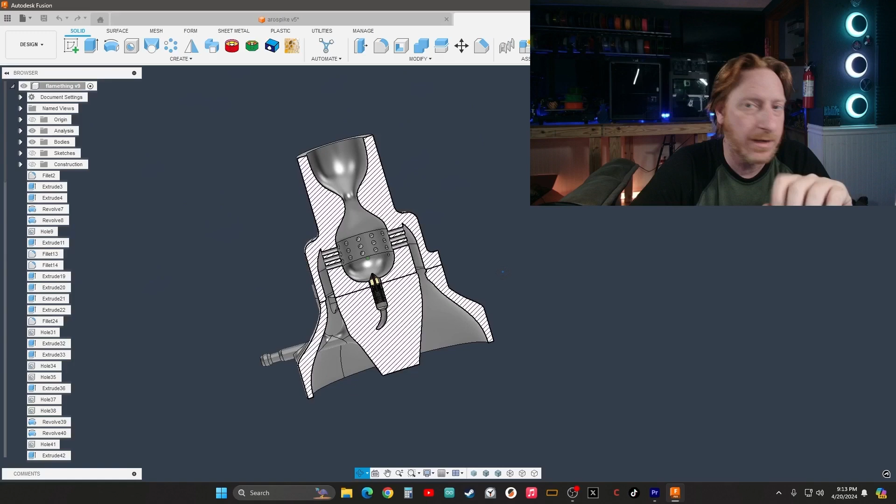Nozzle heats up and the plastic it flows. A creation takes form as the live stream goes. Heart of a maker with a tech-savvy show. Designs in the making, see the hotbed aglow. It's shenanigans 3D on the digital stage. With each layer printed, he's the maker.

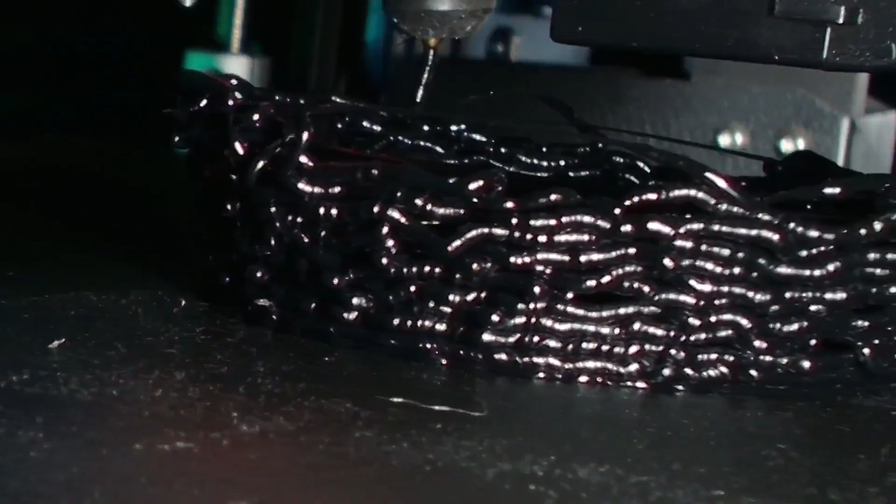Let's start the show. Layer by layer, we watch it grow. A twitch in time with shenanigans flow. Chaos reigns with a fiery glow. We're live. We crash.

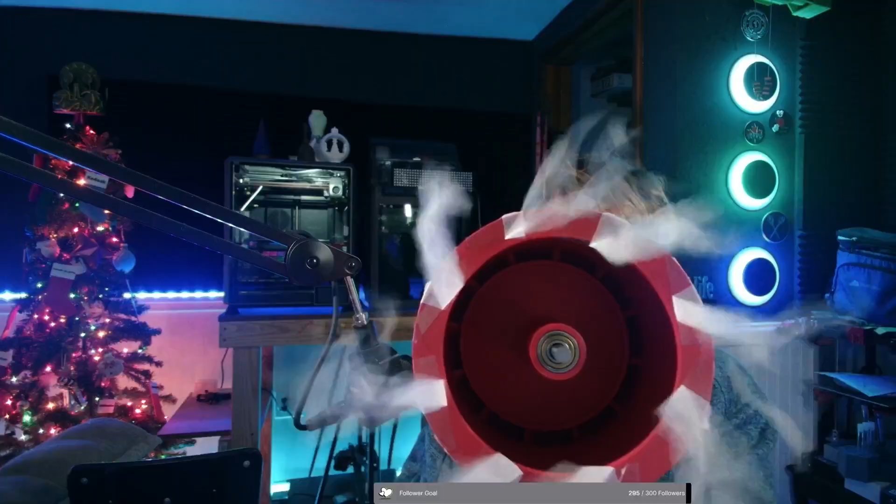Now watch closely as the filament spins. A wild ride where the line between fails and wins. Accidental art when the plastic rebels. Shenanigans 3D, he's breaking all the levels on the edge of tech.

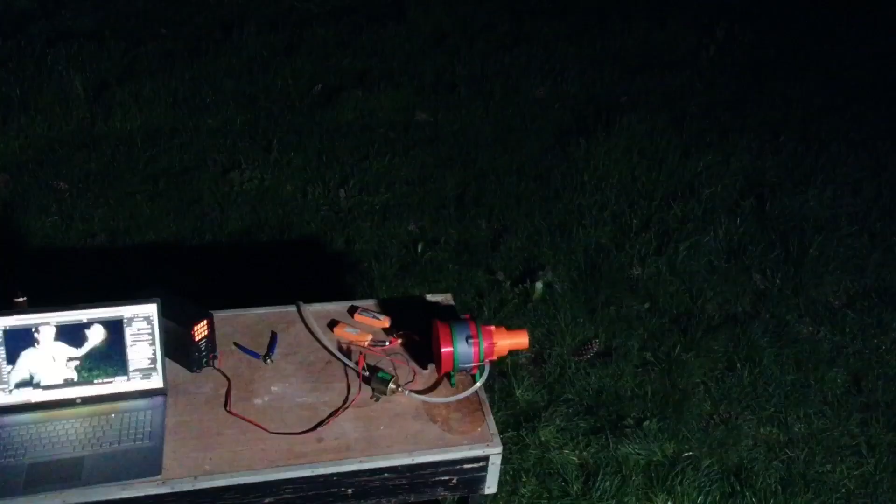Every stream's a gamble, roll the fiery dice. Pushing limits, bending rules, not one to think twice. Heartbeat pulses with each print he creates. While the chat's wild wonder in suspense they wait. Rising with the flames in the shenanigans game. Printing out the future, no two prints the same.

What is going on, everybody? Yes, this is a surprise pop-up stream for a Monday. I'm sitting here going over some things, and I was like, you know what, I'm just gonna stream it. I'm just gonna stream my day. How's everybody doing? I hope everybody is well. I just did my shout outs, and I'm checking on something. I did something. Yeah, I did something.

I did something that's... oh, the wrong button. I did something that involves this. So something's coming, and I'm checking it right now, and it has been shipped. Something's on its way. It is coming from KB3D.

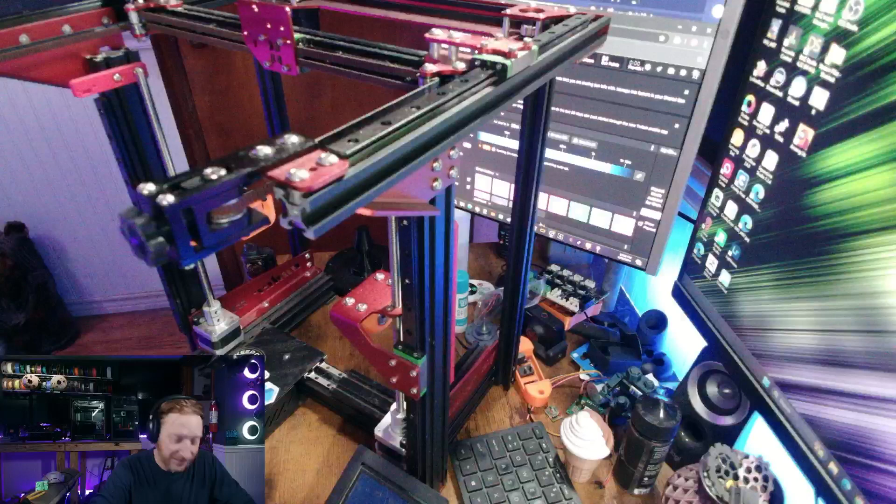Gonna work on this today a little bit more. Yeah, they are very quick at shipping.

They sent me a care package 9 or 10 months ago when I started streaming. Chris sent me a package, and he asked me for my address, and I gave it to him, and like a day or two later, I come home and there's a package on my porch. I'm like, what the heck is this? And I open it up, and it's a whole box of resins. So he surprised me with that, and we've used them here on the stream. In fact, I got more resins in my cart. Well, I took them out of my cart because I bought something last night, and I didn't want to add that to the order quite yet.

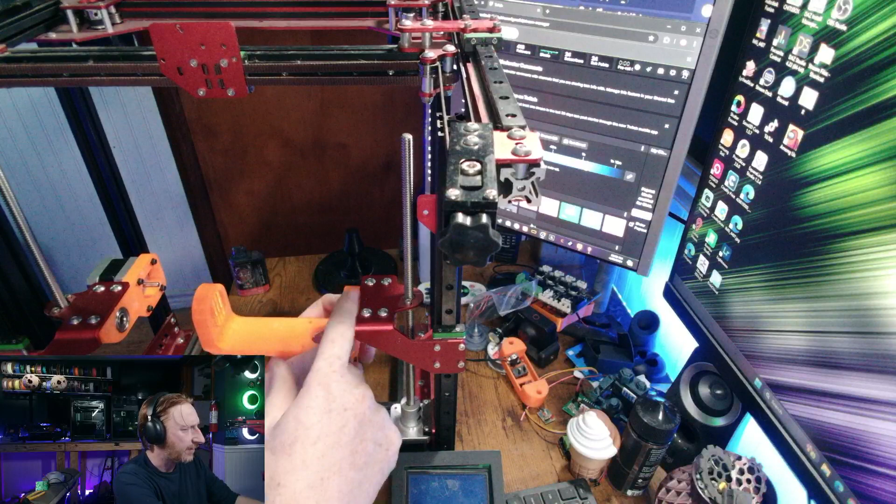We have plenty of room. We got the pulley that's going to go here. And this will be up against this, okay? So we'll have the flange coupler right here, and that will be up against these bearings. We have this much room, but we have the pulley that's going to go here, right? So we got a bunch of room there. So we can move this stepper out to clear the screw heads, and that's where we're gonna go for there.

But I tell you what, noticing this right now, look how flexible that is. That is very flexible. So we will have to beef this up a little bit, and we got to make sure that we're really solid with the build plate. When the build plate's up here, we got to make sure that it's not wobbling on us.

And if I run a thrust bearing down here, I'm gonna want to do another one up here as well, right? So we're gonna have to have two of them up here to keep it from wobbling around, which is fine, because if we brace this across here, then we can add our other bearing up here without having to put some kind of column up there. So yeah, that's what we'll do.

So, one thing I need to do is, this is the idea I have for this. Let me get my face off cam so we can get full screen here. So I actually want to make this pretty nice, so we can make sure I'm not hitting my monitor over there, which I was.

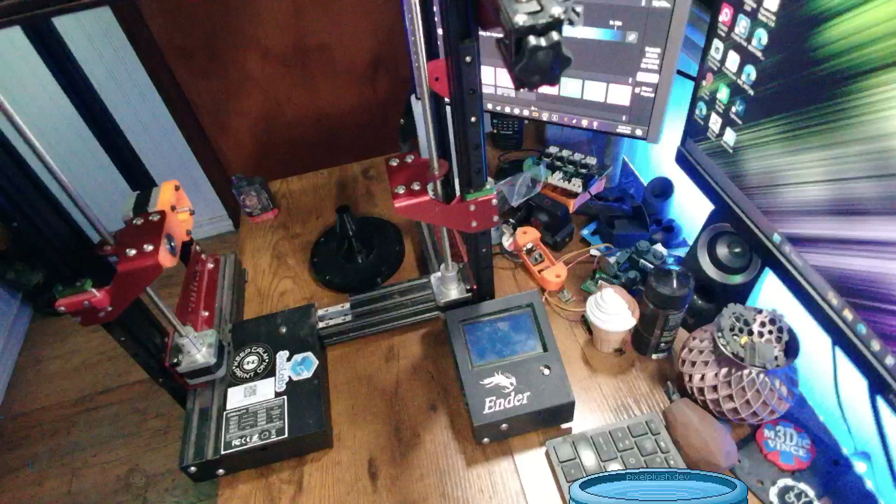Okay, so this is getting removed. Let's bring this down here for you. All right, so this is getting removed. We'll remove this today, this is getting removed. This is getting water cooled, I want to water cool this. There's really no point to it, but I want to water cool it. I kind of want to make this like a flashy kind of thing, right?

There's going to be a control board right here. I need to make a mounting system for it. It's going to be enclosed, we're going to 3D print an enclosure for it for the control board, and I want to have it lit up inside, probably red. So there's going to be red LED strip inside. But I got to reach out to KB3D and have him see if he can cut me out a piece of acrylic.

White acrylic, and then laser etch shenanigans across it, either shenanigans or my logo. And then I want to take white LEDs, real little teeny tiny ones, along the side just to light up the etching. I think that would be pretty sick.

The power supply, okay. So I'm going to be running two power supplies. I know, you're probably wondering why. So I'm not going to go too far into the reason why I'm running two power supplies. I probably actually don't, no, you know, I should probably only run one, because if I'm thinking about changing that out, yeah. Anyway, power supplies will be here.

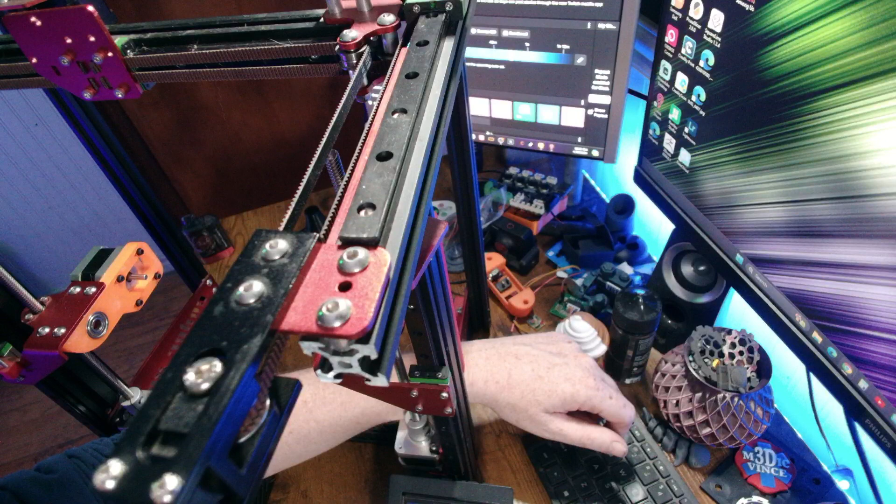There, Maker Deck, they shout. I want to make sure they did a notification for me. I want to make sure I get that back there.

Yeah, I can't get this. I cannot get this screw out for some reason.

Oh, my ear's itchy. What's up, Phantom? How are you doing today? Let me go get a tool real quick, now I should get this out of here.

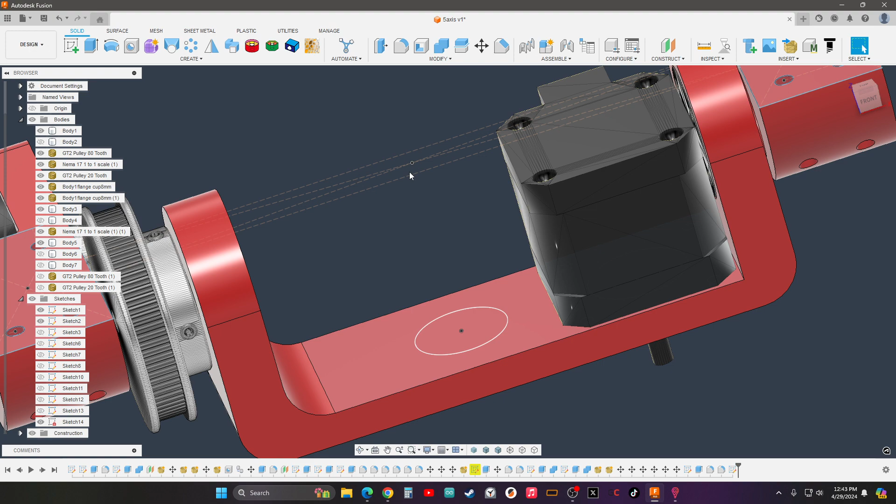See, what's interesting though is these lines right here, that's my center point. That's my center point of the machine. I measured that out. Let's see what, from this point to this point, what is that? 158. That's not right. This must have moved on me. That's not right because I know it's not 158.

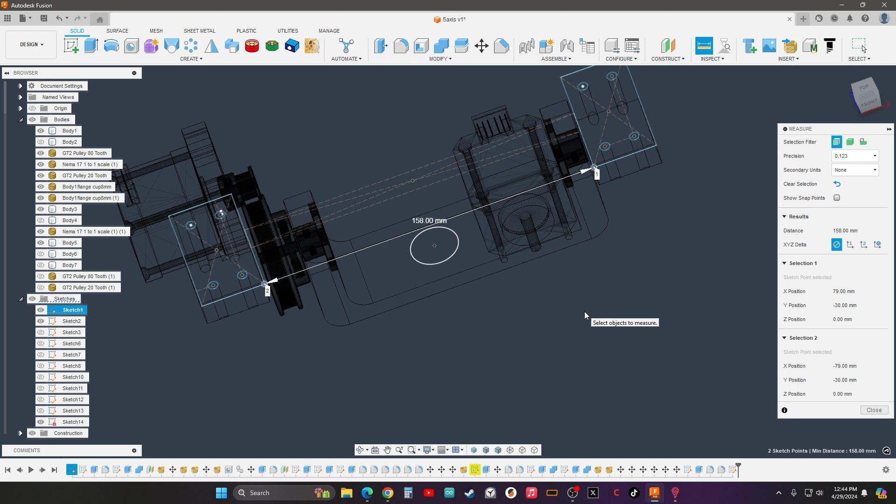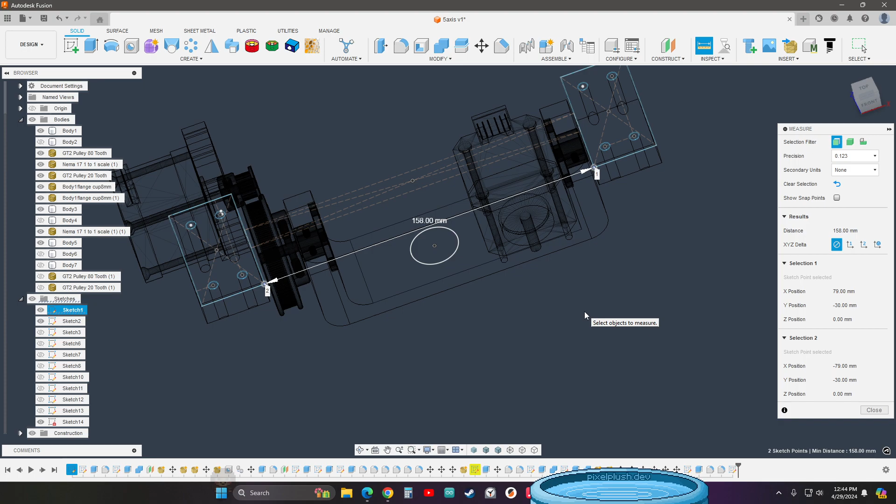I can actually measure it right here on this. So I can bring back my overhead here. Well, that's gonna be crooked. You guys got to deal with it. Well, it's not even working now. There we go.

So that's 158. And this, if we go to 150, I know it's longer than 158. I know that. So we go to 150, and we measure from here. Actually, let's measure this. That's 149, and we go from here to here.

Let's say that's 49. My math is not working today. Yeah, 198 is what I have. 150, so that's 40 millimeters. That's 40 millimeters that we have to play with. And then what is the thickness of these? What's the thickness of these?

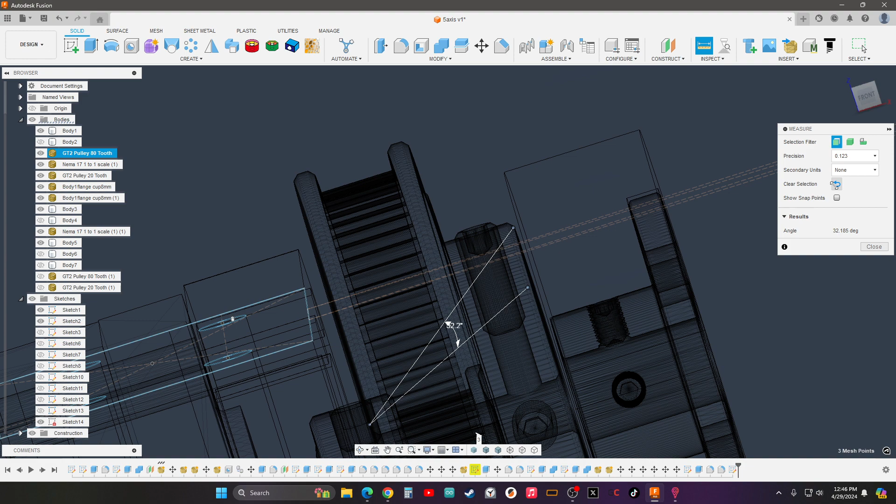So we got like 20 millimeters to play with. That's not accurate at all. This is not accurate, but it'll give me, dang it. It'll give me an idea. 24, well, it's still not accurate. Why is that going? Why is it doing that? Anyway. We have probably about 20 millimeters to play with to move this. We can move this over.

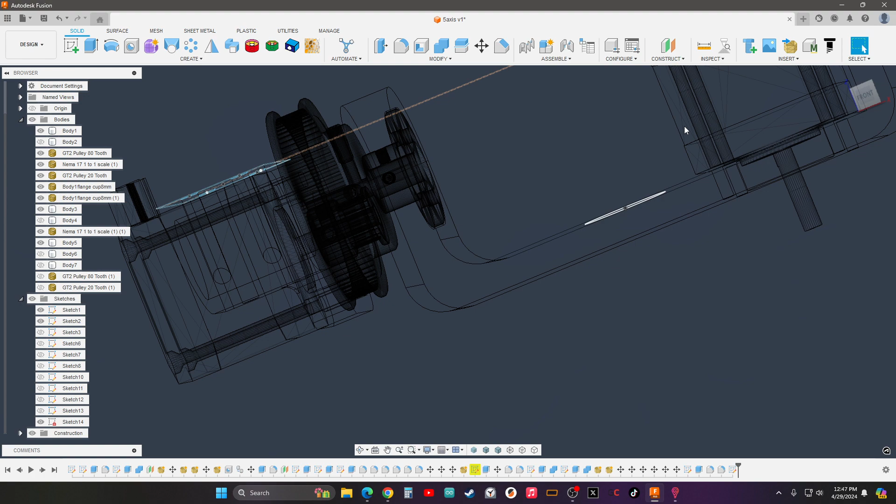3D Print World, welcome in, my friend. Hey, what HT were you looking at? Were you thinking about getting? How are you doing today? I need my coffee. Coffee's always good. Oh yeah, coffee.

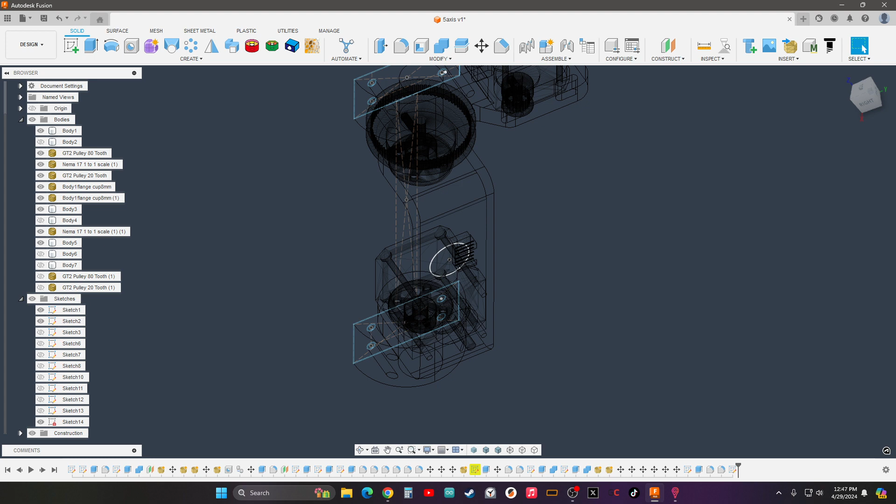Okay, so let's save this. I'll move that over later. We'll save this, and we'll go into the design, at least somewhat give an idea of what size box I need to make this.

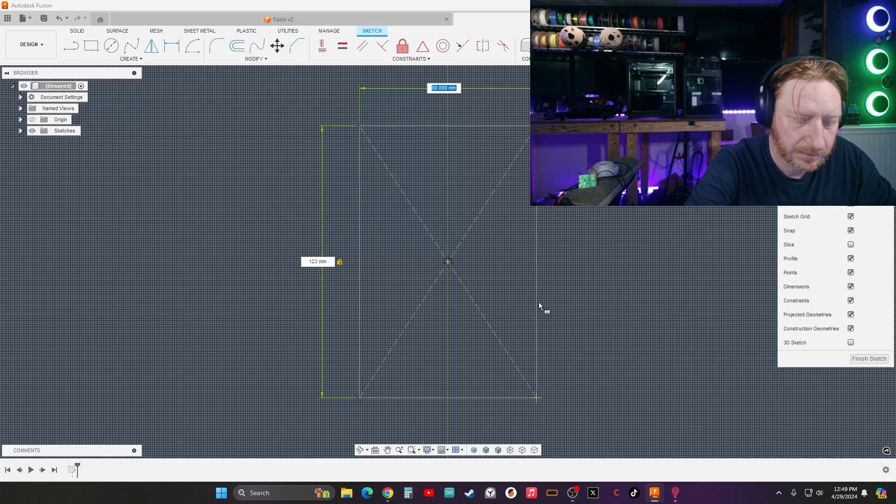Okay, so what were the measurements again? Measurements were 123 by 247. That's not right. Forgot to hit my tab. 247. That's a big box. That's gonna be a big box.

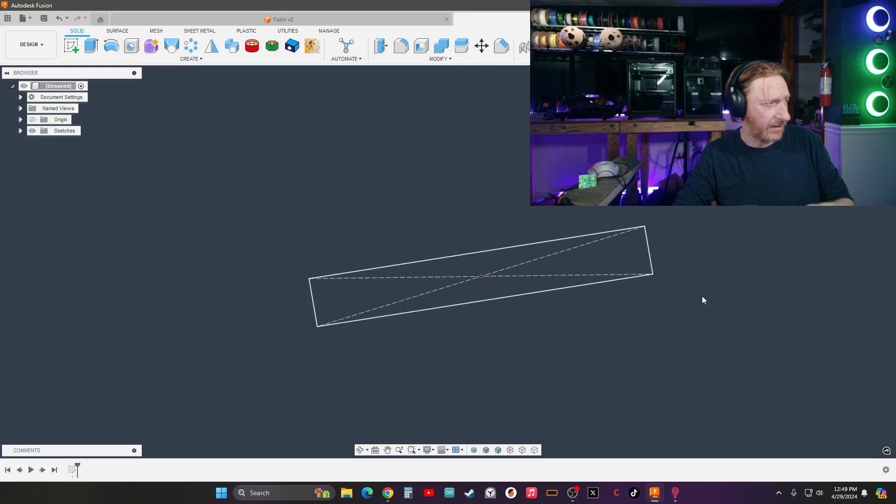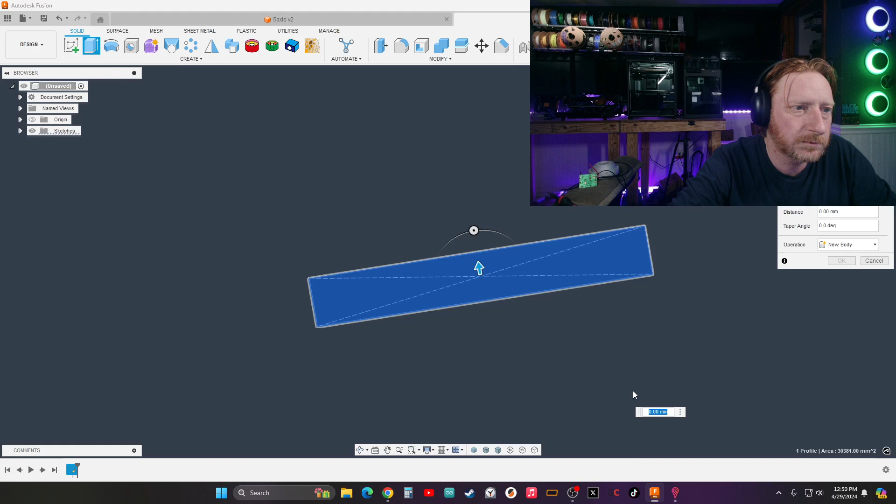The height of this. I'm not sure how high this thing is though. 40 millimeters. Okay, so there's our box. And let's do a shell. Let's take the shell. We probably should take the shell. Two millimeters. We'll take the shell 2 millimeters because we got to worry about ports as well. So we'll do 2 millimeters. This will probably going to change.

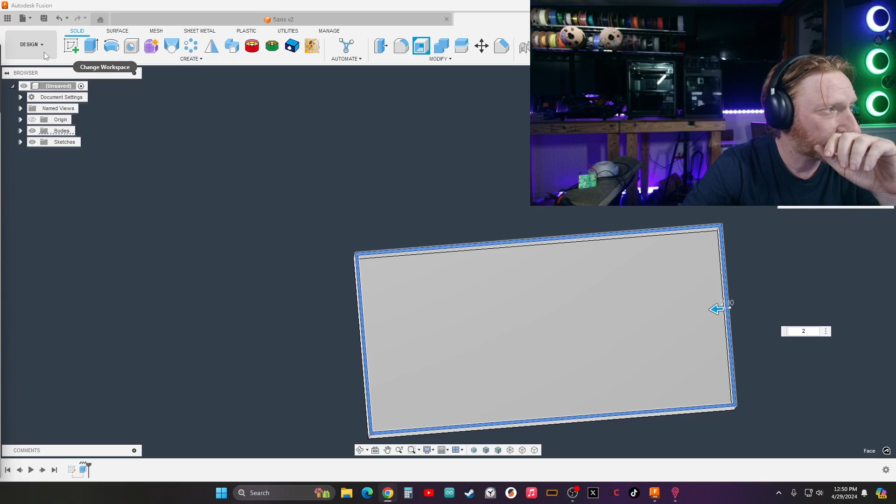So now I need to bring up. Make sure you don't see this. I need to bring up the dimensions of this product, of this thing. So this thing, let's do an offset on our, bring an offset up to about 10 millimeters. That should be good.

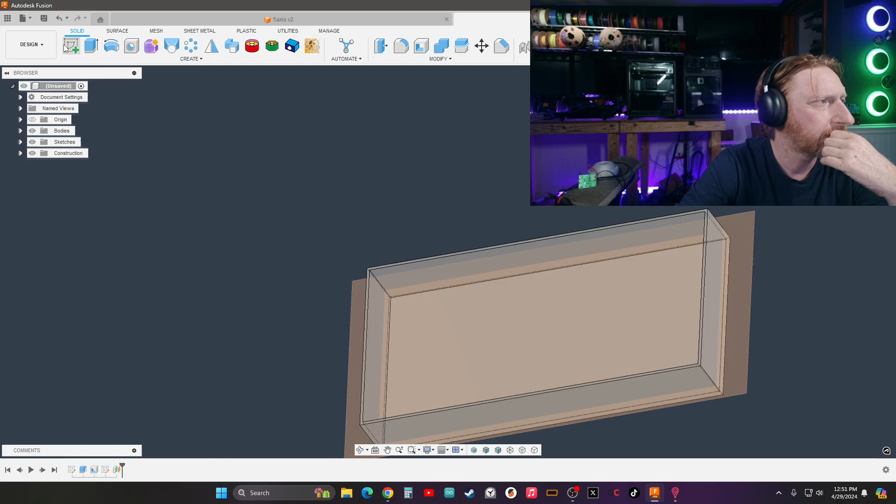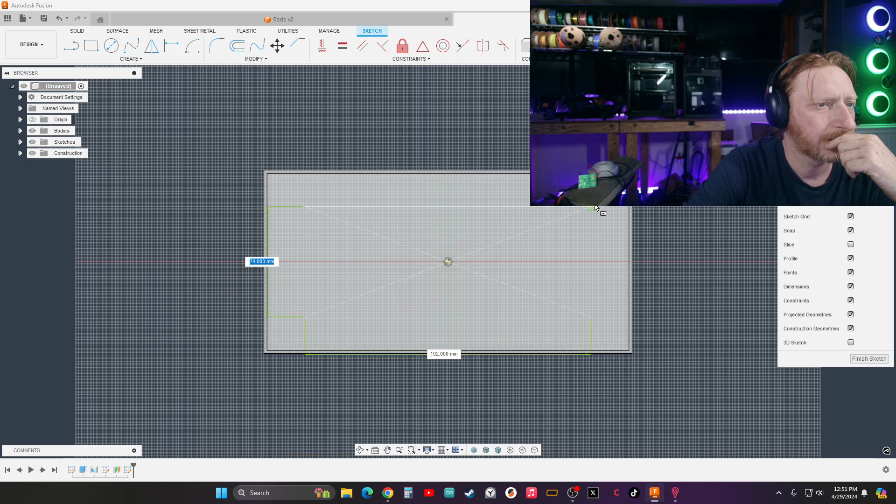Did you see what Two Trees just released? They released a printer where the bed moves around like this. The bed moves up and down, like twists. It pivots. But that's only for leveling the bed. I don't think it's for printing that way.

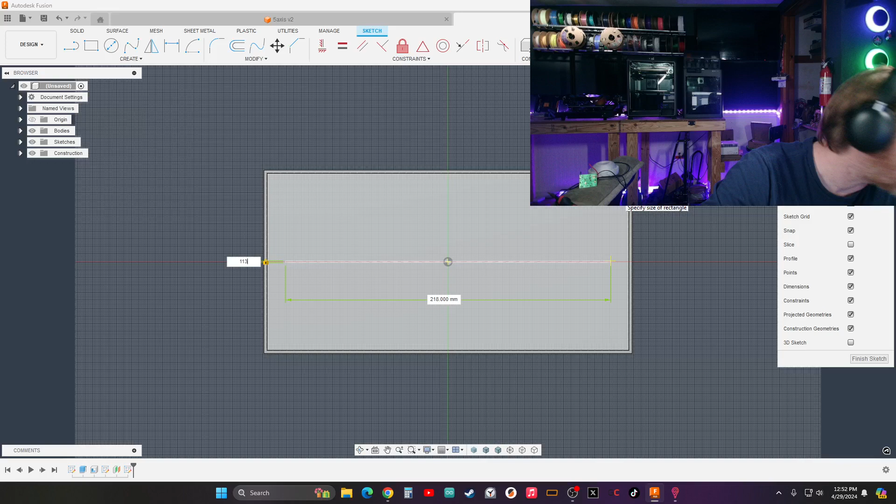Okay, so these specs are 200.03. Nope, that's not the right one. They're 113.03. And hit the tab. 200.03. Ooh, that's pretty big. Wow.

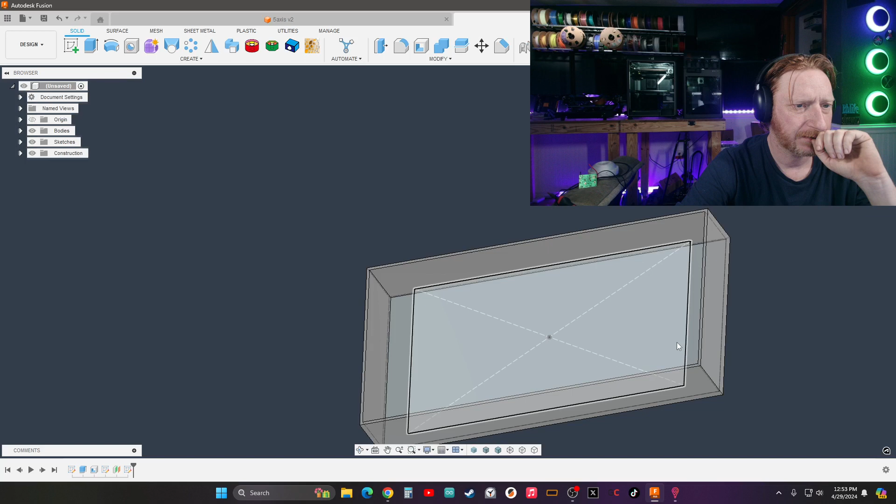So I have power on this side, and I have ports on this side. That would probably work. So that's 200. What did I say this box was? 247. So that gives me, that's giving us 20 millimeters on each side. So you might have to shift it over, because those are probably going to be some pretty thick. I think we can squeeze that in there actually.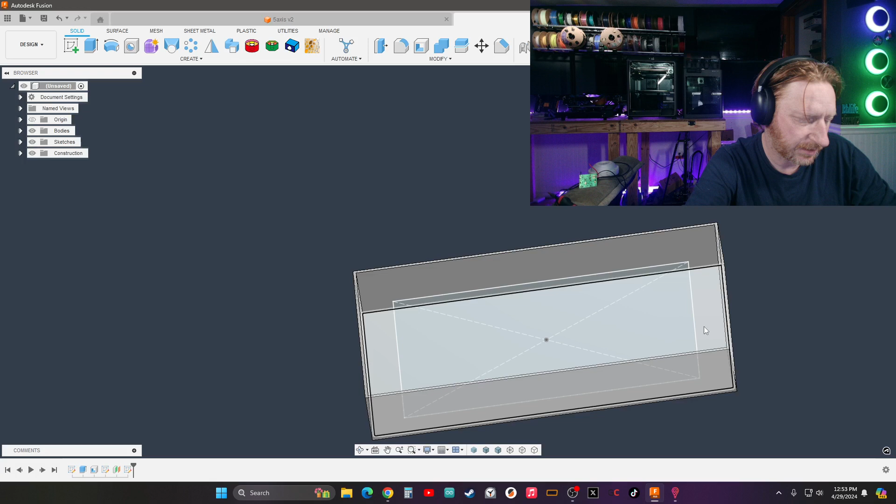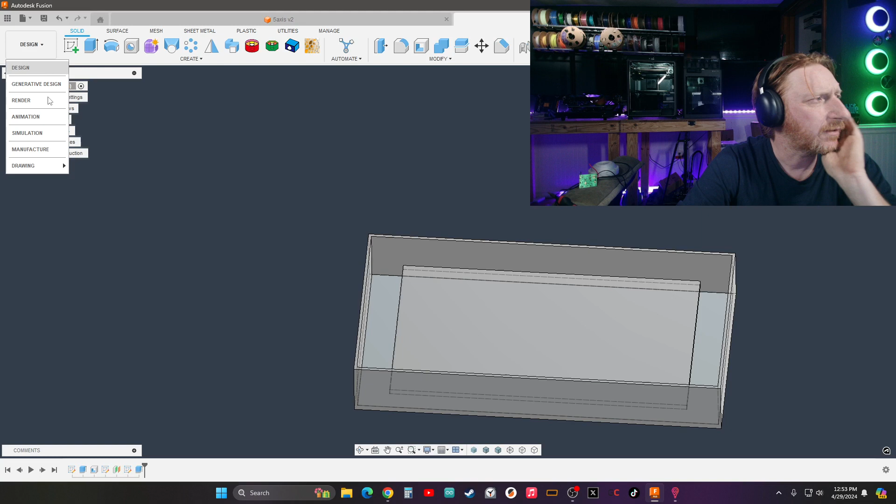Let's do this at 4 millimeters just to get an idea. Let's go into the design and let's render this. And we're not going to fully render it. We're just going to...

I don't know what printer fits it. I think it's more for custom. It's more for custom printing. Custom printers, like Vorons and stuff like that.

So let's color this so we can see what's going on. We'll do, I don't want, gotta download some things.

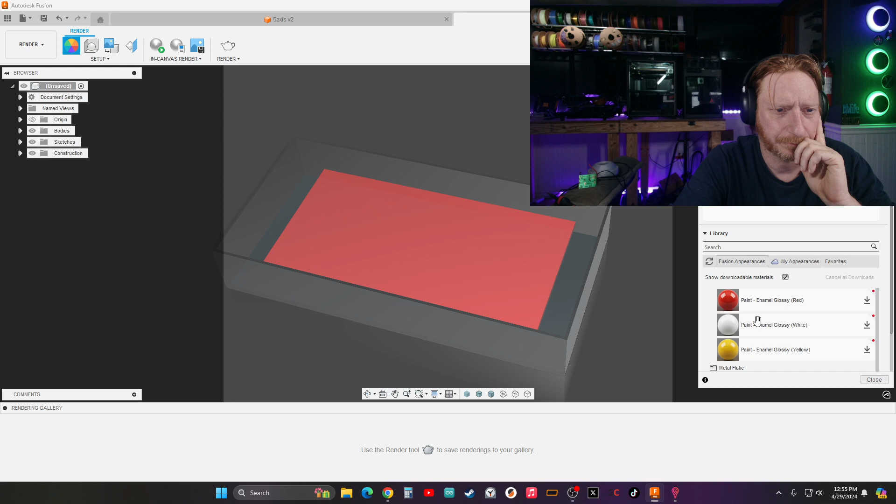I wish they didn't have glossy paint in here. Well, we should probably actually do this in gray for now so I can see what the heck I'm doing.

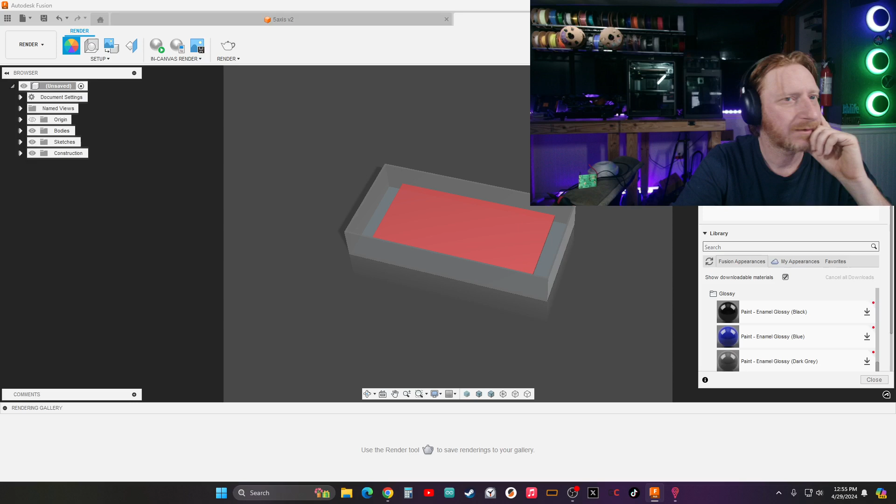God, I love meetings. Okay, so let's get back into here. So there we go.

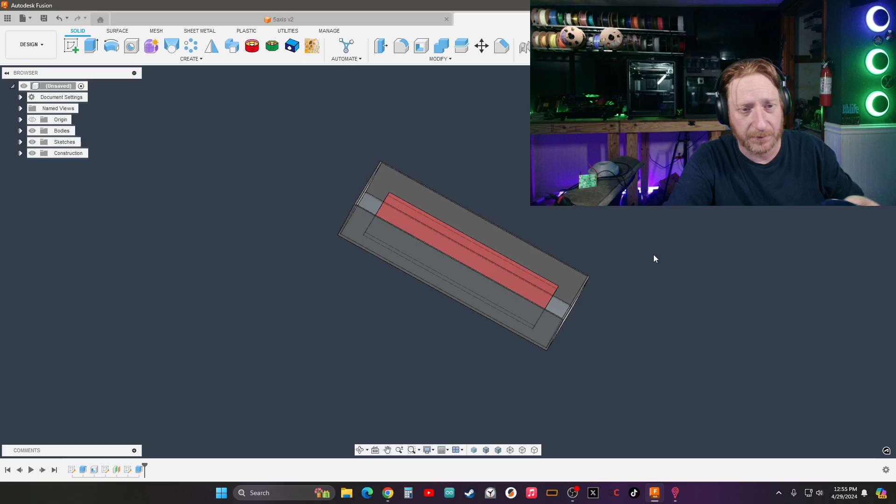This is going into the core, into the 5-axis, the one that we worked on yesterday. This is going to be for the control panel. This is the control board. It is going right in front of the printer.

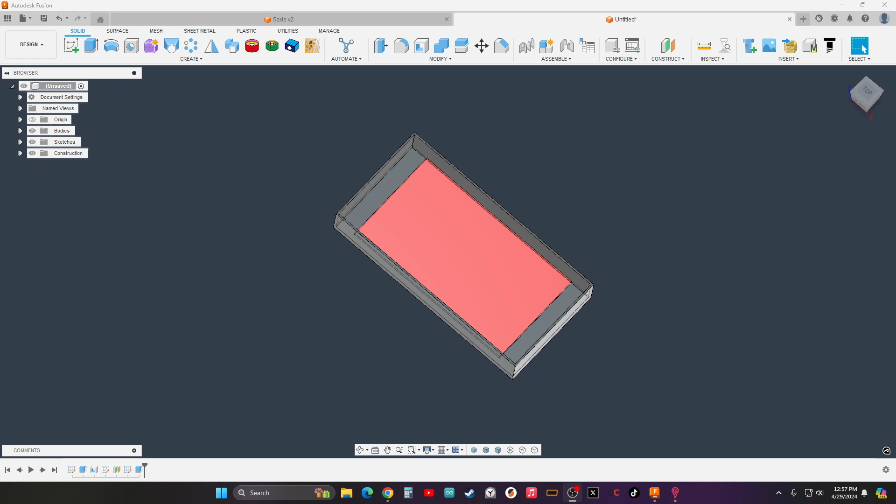Sorry, I walked out of the room to find my dogs ripped my bed sheets off my bed and they're laying out in the living room. Anybody want some dogs? They're real nice. They're not friendly.

Anyway, okay, so let's get back to the screen here. Oh yeah, no, I was gonna show you. Yeah, so the control board's gonna go right here. We're gonna make it all nice and pretty.

Yeah, there's gonna be a water cooler here. The radiator is gonna go here. I'm putting a water cooler on. Why am I doing that? I don't know. Power supply will probably be here, or maybe here. Maybe put power supply here. Actually, I don't know, we'll figure that out. We'll see how many power supplies, if I'm running dual power supplies or not.

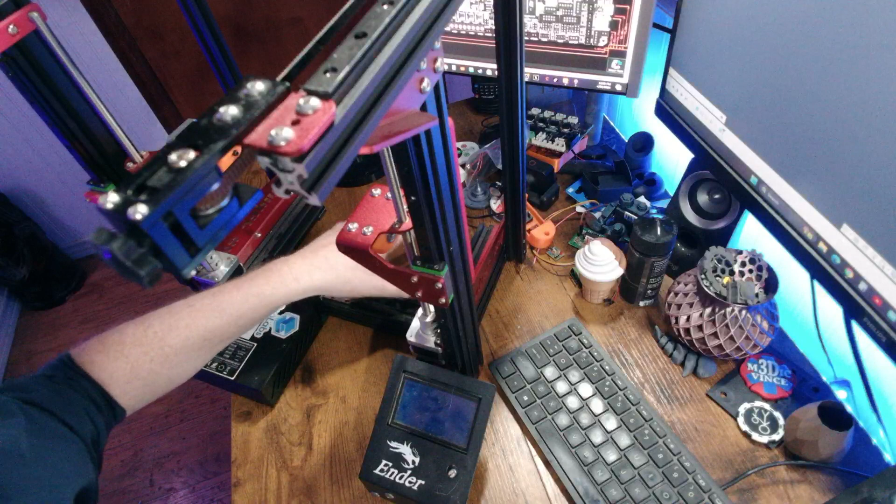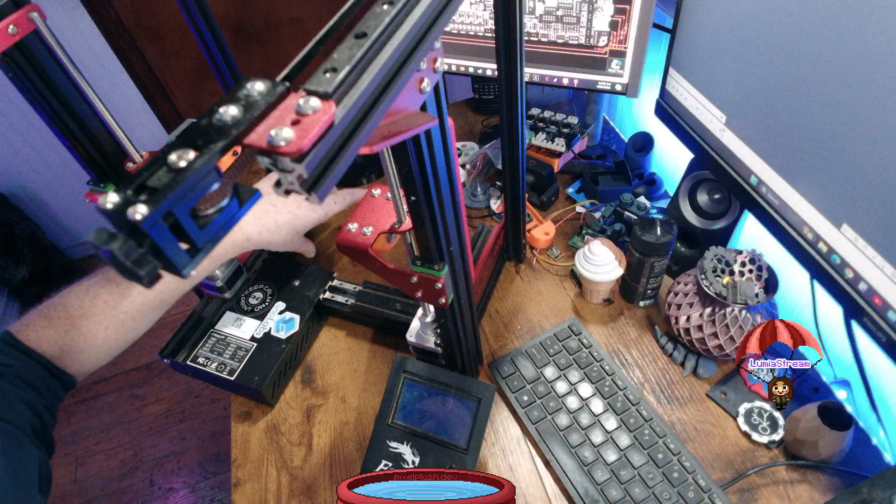Yeah, we'll see what happens. I might run a single power supply. Actually, let's see how much. Yeah, I might run a single power supply and then have a converter, a 10 amp converter. I do have a 10 amp converter, a step down buck converter that will drop it down from 48 to 12. So maybe I'll just do that.

So this, I do have a rendering program that I can put models into and render them in high def, so we can do lighting and stuff inside here, but I don't think my stream would survive that. Doing some of that rendering is some pretty serious stuff.

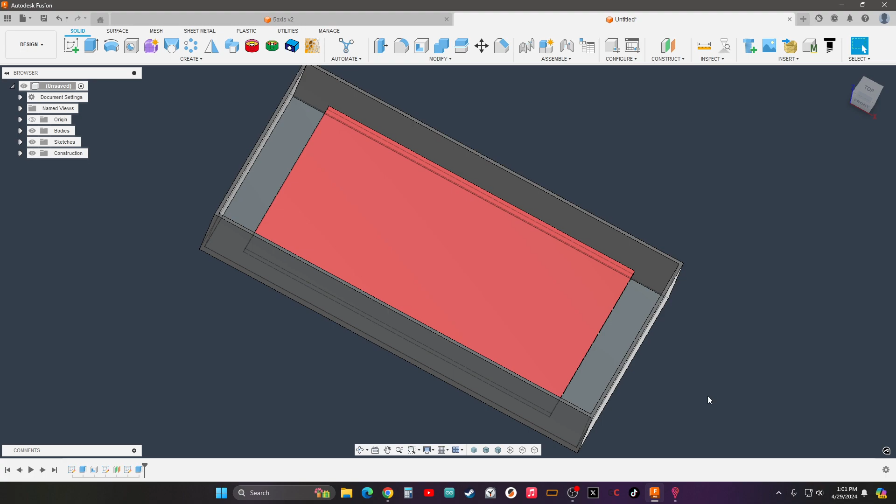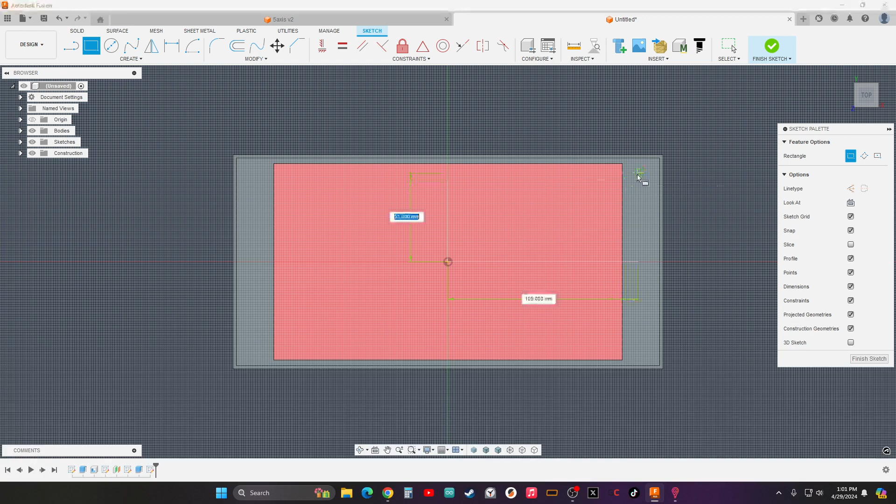So we have that, and then we'll have this. It'll probably just be somewhat like that, that way my wires will be hidden here. I don't like the edge of the board. You'll be able to see a little bit of the edge of the board, but the main part of the board will be visible, the logo will be visible, that will all be visible.

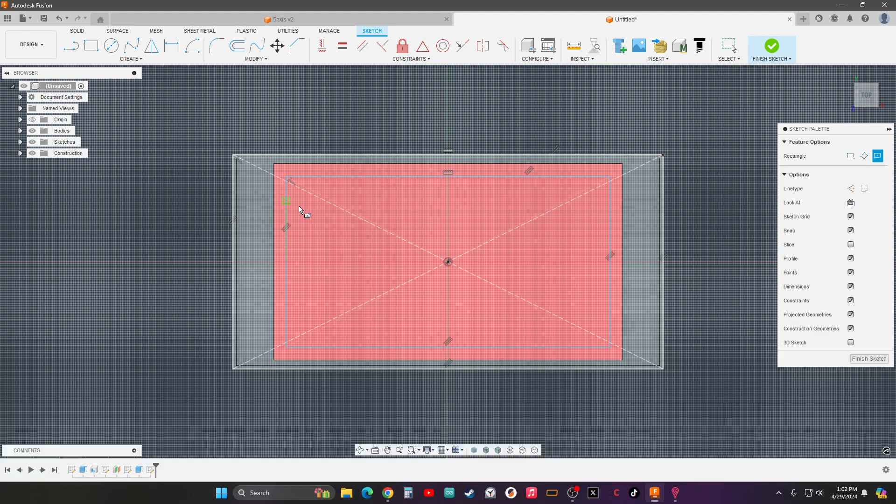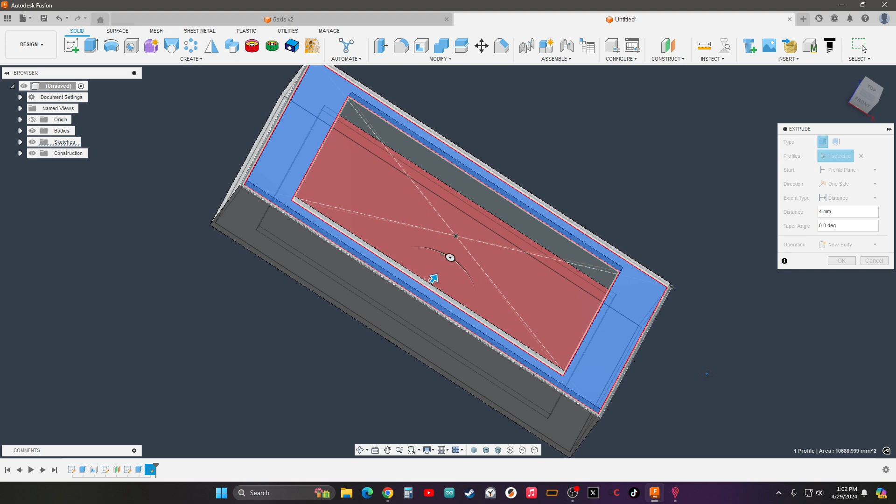We'll finish this sketch, and then we will extrude this up about 4 millimeters. We'll actually add some — no, let's take this to 6. Let's take this to 6.

Oh yeah, definitely, I do most of my rendering and stuff on my other PC. I can do small stuff on this one, small renders.

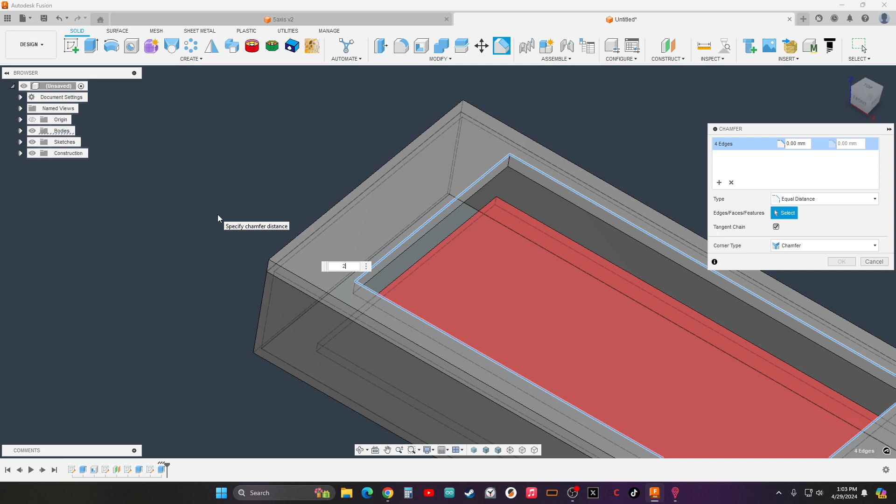Okay, we're gonna make this a new body. I do want to bevel this though, probably chamfer it maybe. So we brought it up 4, we can probably go 2. Now let's see what it looks like if we go 3. We can do the same with this outside. Yeah, let's do 3 on this one as well.

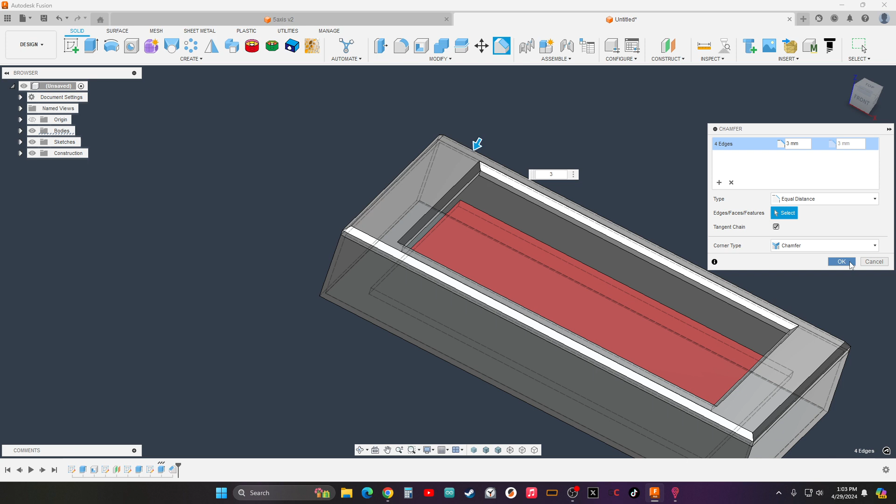Let's go into the rendering of this, and we'll change that color to the color we were using, which is, we're going to go to black.

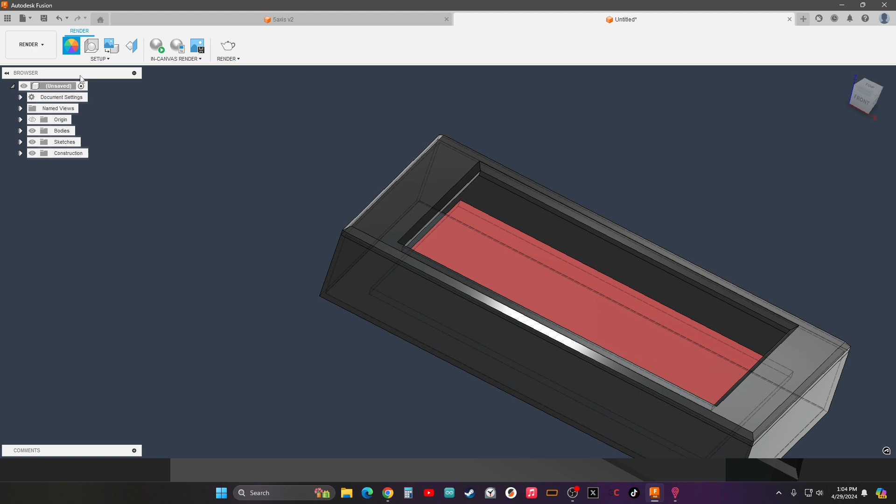We are working on a 5-axis 3D printer. I'm using an existing printer, actually an Ender 3 that has a Core XY kit. And now we're designing the 5-axis — we designed the 5-axis mechanism yesterday, we need to go back and fix it. Right now we're designing a display for the control panel for the main controller.

I think I'm happy with the way that is. Let's actually get the...

Username shortcut is broken. What do you mean the username shortcut is broken?

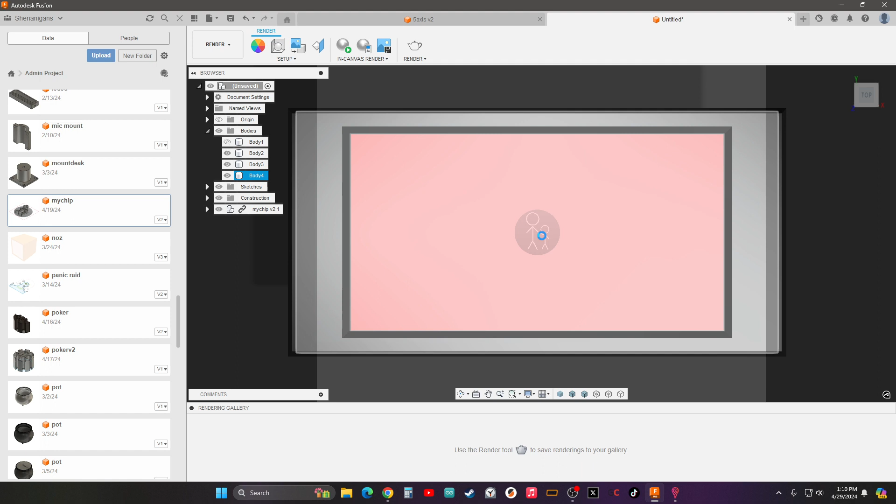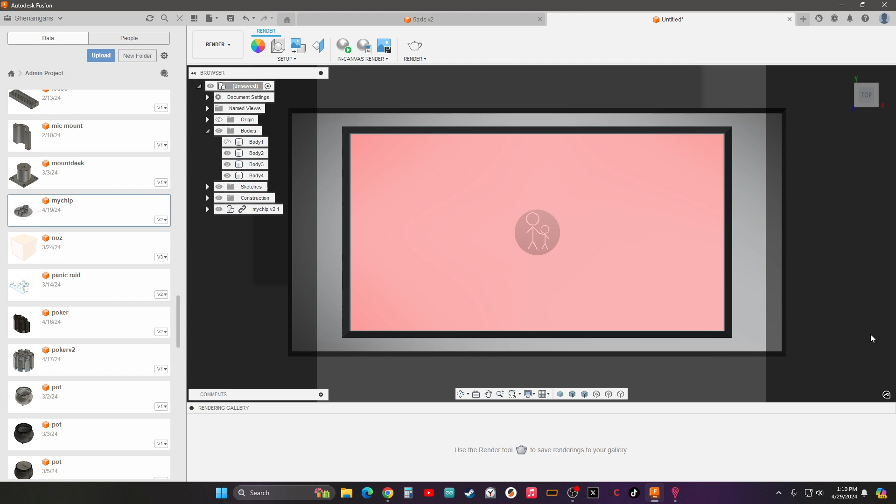I have a 4 terabyte storage. I have 6 terabytes total on this PC, something like that. So yeah, I have an internal hard drive that's 4 terabytes, that's just strictly for storage. And then I have a 2 terabyte that's for the PC itself, for all my stuff. I think, maybe it's 1 terabyte.

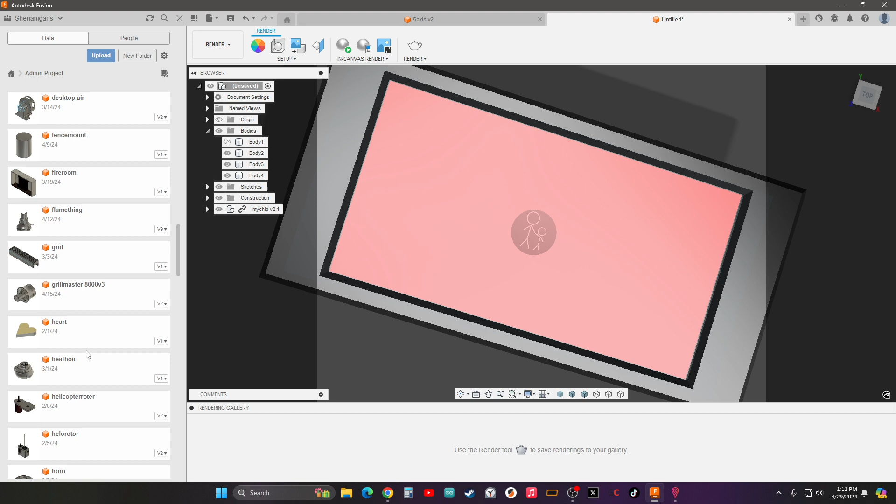And I have a RAID system for my house, so anything here I don't want on my PC, I'll just send it off to my RAID. This is all just stuff I work on throughout the week, just a bunch of ideas. All this stuff here is just all ideas. Well, there's my little desktop air raid siren, and then a couple of rocket motors and just a couple of things. I need to go through here and clear it out.

Okay, so where is this? What's all in here? The body. How can I access this? Oh, I have these all down components now, don't I? Yeah, I do.

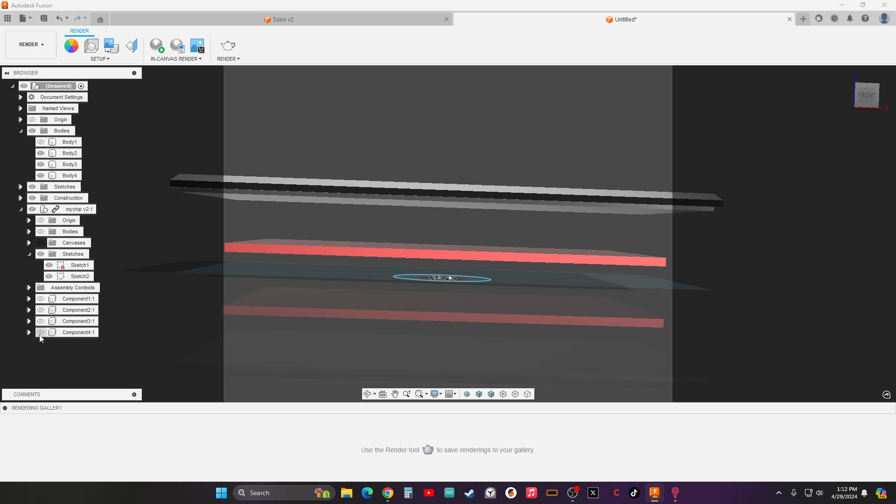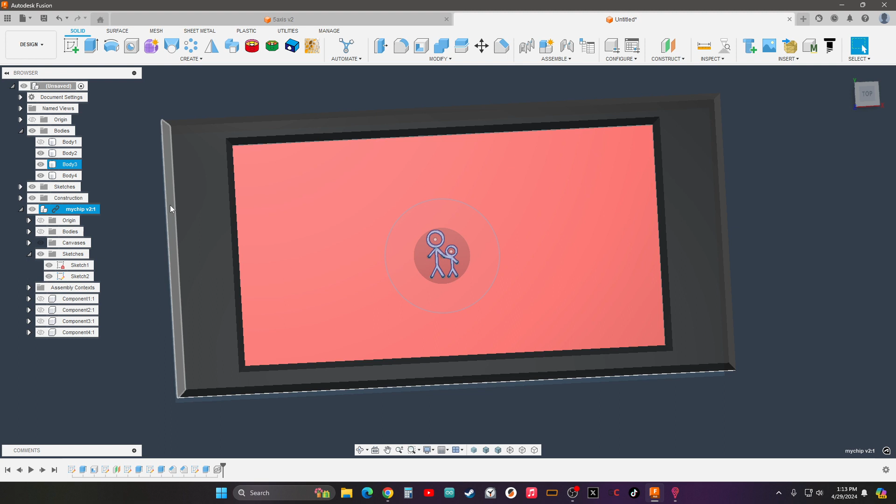Okay, so let's get... I don't know if I like that or not. Oh, I'm in the wrong freaking... No wonder I couldn't edit anything. Still can't edit any of it.

Let's modify it. Let's see if we can do... where's my scale? Let's get rid of this body and this body and that body. It's not gonna let me select it, is it? Nope.

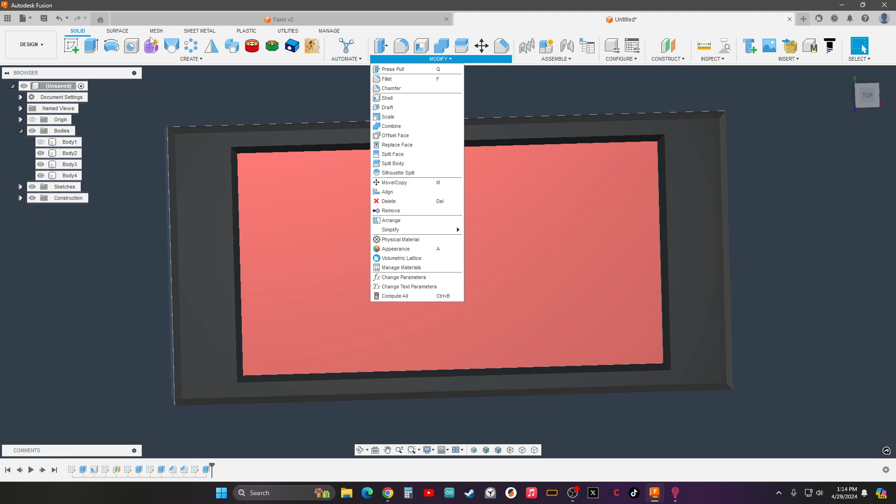I tell you what, I'm not sure if I'm liking this. So let's cancel this, and we'll get rid of this, and we'll do some text. Where's my text?

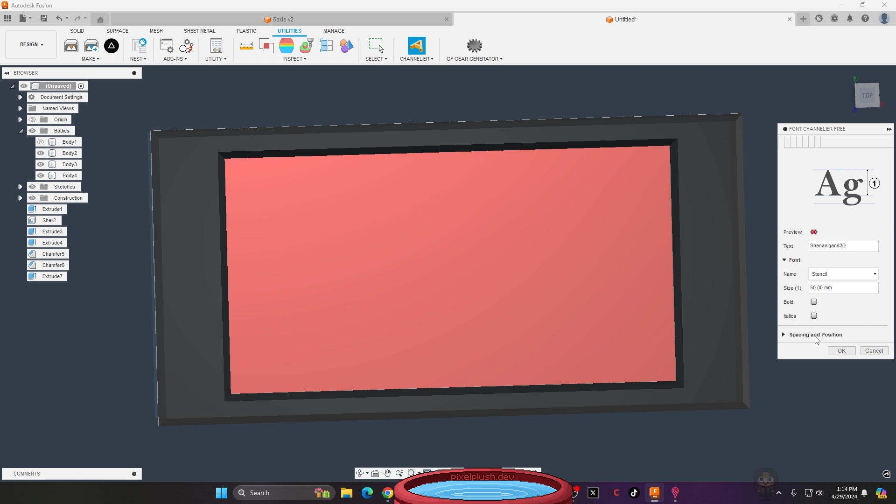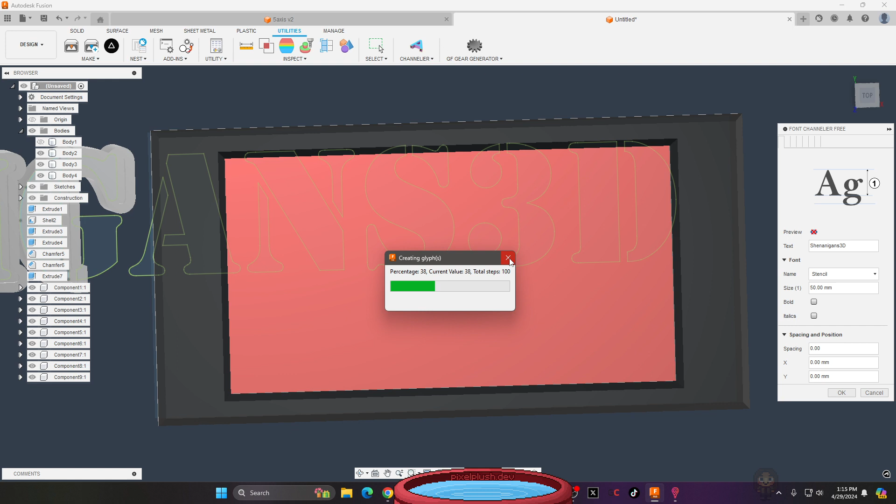Is 3D. Stencil, we'll try stencil. We'll do, let's see the size, we'll do the size at 50. Oh my god, we don't need 50, that needs to be... No, we are not going to do a stencil. We're not going to do stencil. Don't like stencil.

I can't cancel this, we gotta let this run through. So 50 is... ooh, now this is gonna crash. So 50 is way too big. Probably do 10 millimeters actually. 10 millimeters should work. Might have to go down to 8.

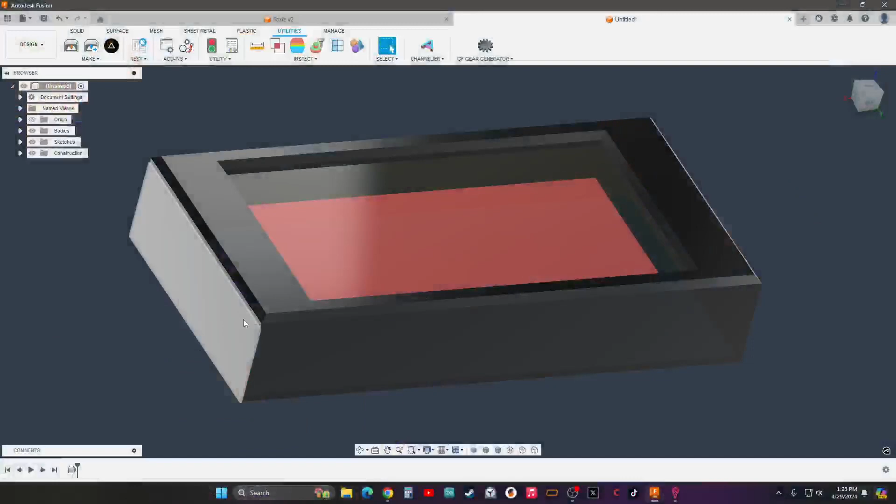So that's what we got so far. I'll keep this design how it is. I do like that, I like the way that works. That will really display the controller, and that will completely display it.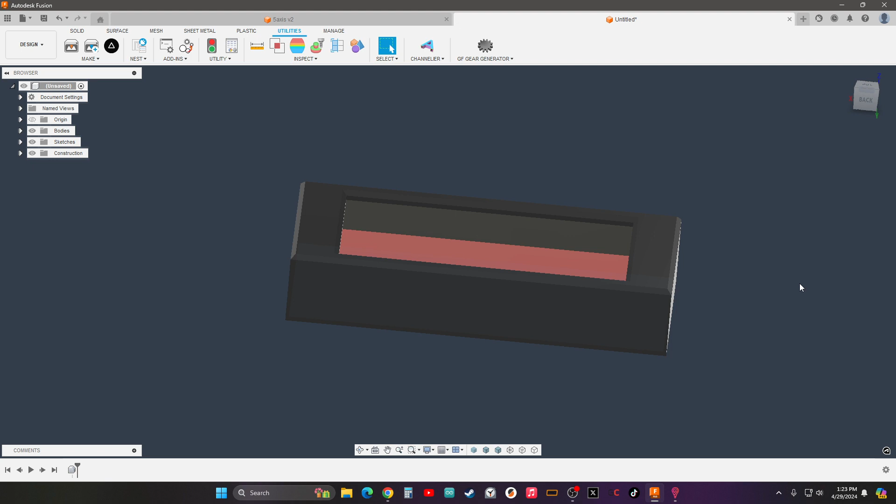We're gonna have to put in like 40mm fans here. Do I have room for that? We might have to do something with the fan, because this definitely is gonna need some fans. Let's get a 20mm... we can probably use 20mm fans. No, we don't want to use a 20mm fan for that.

That thing's gonna... and when you guys see this, hopefully I can get it in like 2 days and have it here. It'd be nice if it was here tomorrow, we can have it on my stream tomorrow. We're definitely going to have to use a 40mm fan for this.

Where would we put that, though? That's the thing. We might have to shift the board over, shift the board and the window this way, because over here there's a lot of ports that I don't think I'm going to need.

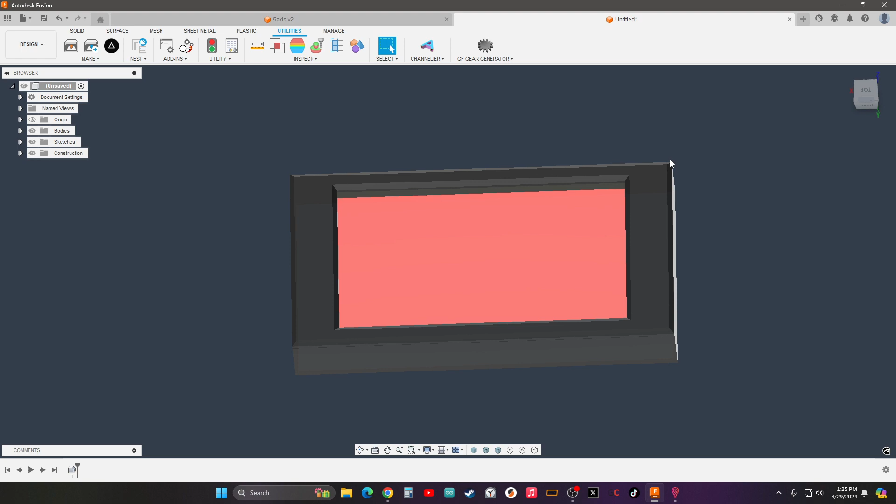We'll have to put... there's definitely going to be thumb screws here. I found some anodized red field thumb screws on Amazon that we'll use to put this down. And it's all going to be 3D printed, right?

What's nice about this is there's only four main components that I need. I just got one of them ordered last night. So we need the power supply. What is the power supply size that I have? Because I really don't need a 48 volt power supply for this.

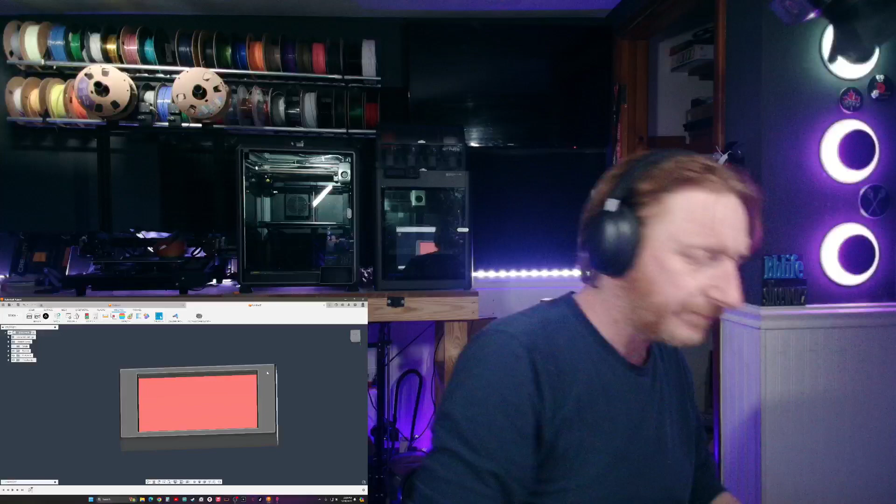What you're seeing here is I got a bunch of ideas I'm going to do. I'm going to take this and hot rod this thing, right? Make it all flashy. So I got a control board coming, I'm not going to say what it is yet, but I have a control board coming. It was shipped, I just got a notification from KB3D that it was shipped.

We're making a display for it. I want to display the control board, I don't know why. And we're going to put water cooling on this thing too, I don't know why, this is just going to be one of those... I want it to look nice, right? Just because we can, I guess.

So this is going to be the box for the control board, it's going to go right here. It's a BTT, Big Tree Tech board that's coming. Everything's all going to be BTT on it. And BTT does make a water cooler, and it does integrate with this board.

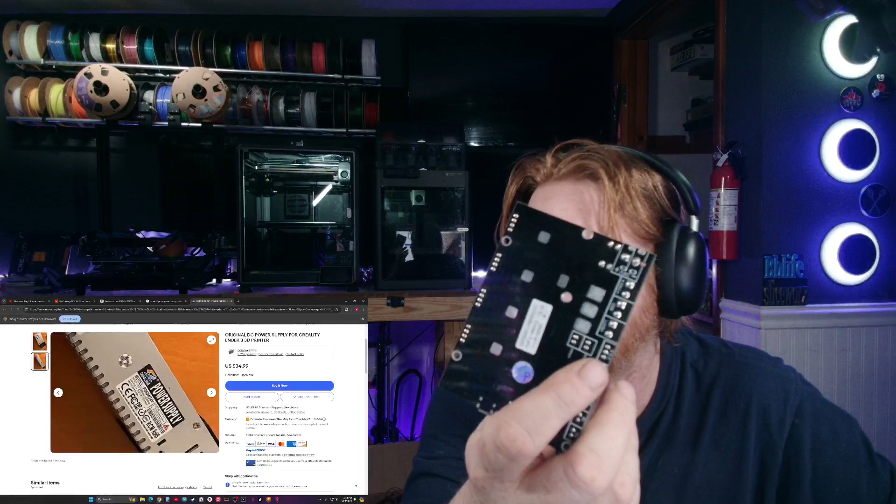See, I can run 2 power supplies with it. Well, here it says it's a 24 volt power supply for it. So how did they do that? Did they have a... yeah, here's a board for the Ender 3. They run it's a 24 volt.

It's not going to focus. Here, 24 volt, and then there must be a buck converter in there somewhere, so I can run 24 volts through the system.

Thanks, Tech Jeeper, it's 350 watts at 14 amp. I wonder if I have it in that closet. It's in, there's a couple boxes down on the floor. I just don't feel like digging around for it right now. I don't want to bore you guys with digging around for boxes.

So we might be able to use the power supply. I think we can use the power, we can probably use that power supply. The only thing that I have a problem with is, I have one of their hot ends. I have one of these right now, but not the water cooled version.

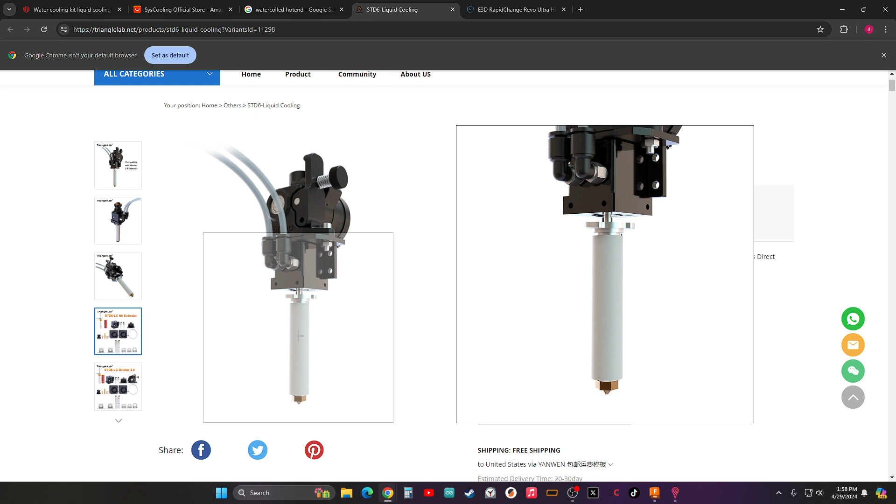This is what I need right here. See how long that is? That's what we need, we need this. Is this a direct drive? But...

How about you put up 3D Print World? Sorry, I can't find that page. Titan Aqua, okay, let's look that up.

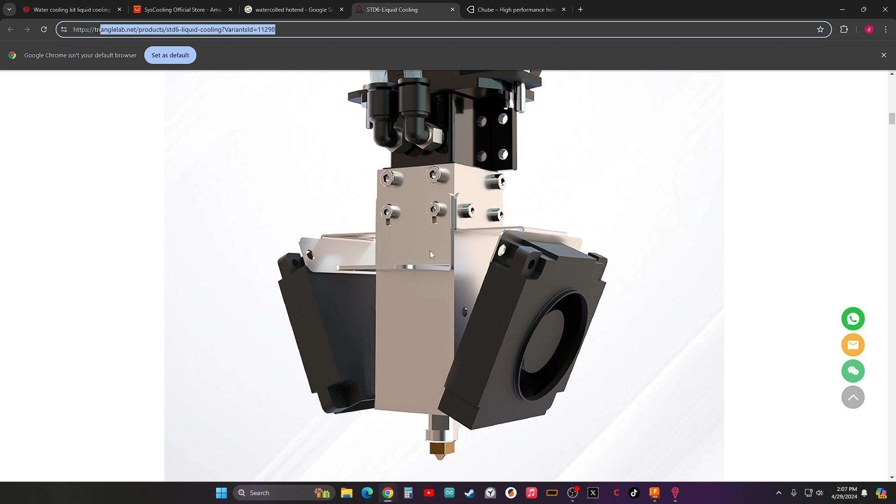Is this just a mount for the fans and maybe for the sock? Because you gotta look, that is quite large. Can we make a custom sock over this? Because if we do something like this, we can put a fan. Let's see if we can do a front view of this.

Are they gonna show us a front view, or are they just gonna show us all back views? We could do like a fan up here, do like a blower, and maybe design an air duct that comes up here, kind of surrounds it and hugs this real tightly, and hope for the best.

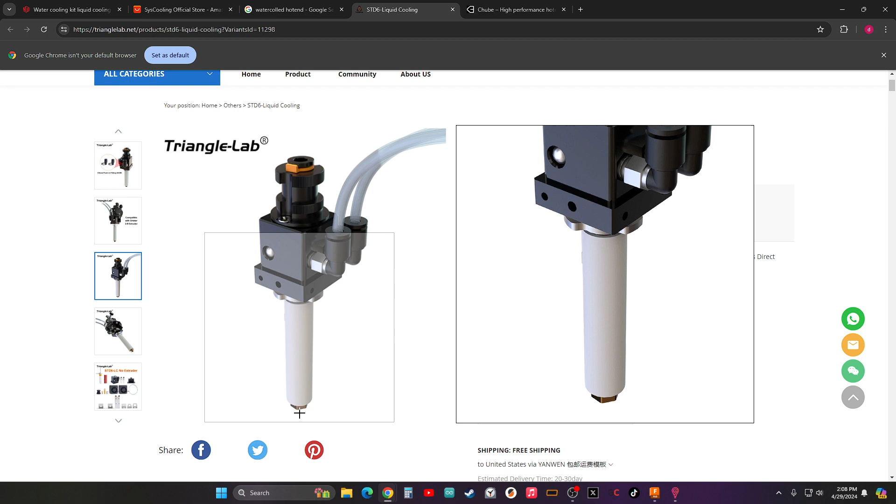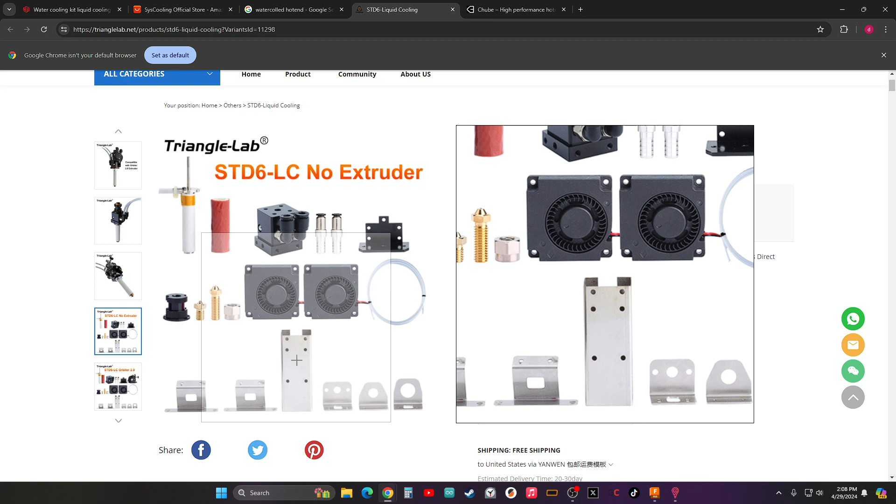Because I was thinking about how are we going to do that? Okay, I see. So it holds the silicone sock, or the insulation is what that does. That holds the insulation here. So we're gonna have to... we could make a custom sleeve for it.

So this is the type of hot end we need to use. We need to use something like this, and we've got to figure out the cooling.

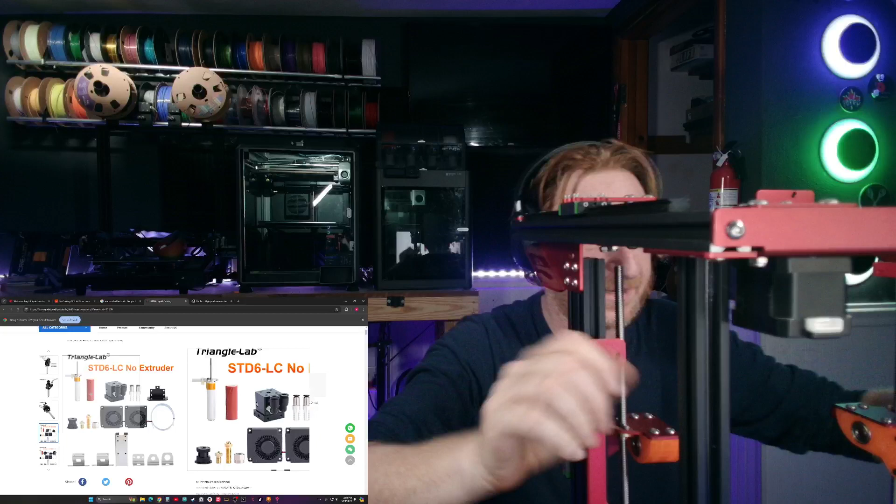What if we run the fan off the side? Let's get back to... what if we run a fan back here in the back? What if we have a blower, like one of the side fans? We'll get a pretty beefy one here and run it this way. The downfall to doing that is when this goes to pivot, instead of pivoting backwards, it would have to pivot forward.

I don't know. My mind's been racking all night trying to figure out the cooling of this.

Wonder if we can mount... wonder if there's a way we can mount the cooling to the gantry up here. Bring this out, bring it down, run cooling here, and have like a mini blower that blows down onto it. That might work.

And if that would work this way, but if it tilts, that would probably still work. We'd have a little bit of an issue here, but we're not gonna be running like that. That would probably actually work if we have it off to the side here. Now have it on the backside, we would lose some travel backward. Well, maybe not. That's a possibility we can look into.